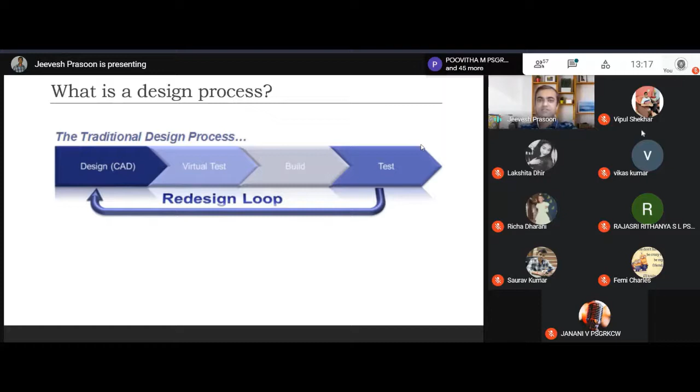Then you do a virtual test, and then you build it and test it again, so a physical testing happens. Between design and test, there are two options: a virtual test and a build. So this is where FEA comes in — the role of finite element analysis begins at the virtual test stage. This is the design process.

In this design process, we do virtual testing, because if you think of the old stage when there was no FEA, you used to design something, then build it using so many resources — manpower, material — and then test it, and once it fails, you design it again. So once virtual testing comes into the loop, whatever testing you are going to do is done using a virtual test. If you say in short what FEA is, you can say we are simulating a test virtually.

Like if you see any National Geographic channel, Discovery Channel, you see a pilot doing virtual testing. They don't directly go fly an aeroplane; they first do a virtual testing. So that virtual testing is not something real, it is a simulation.

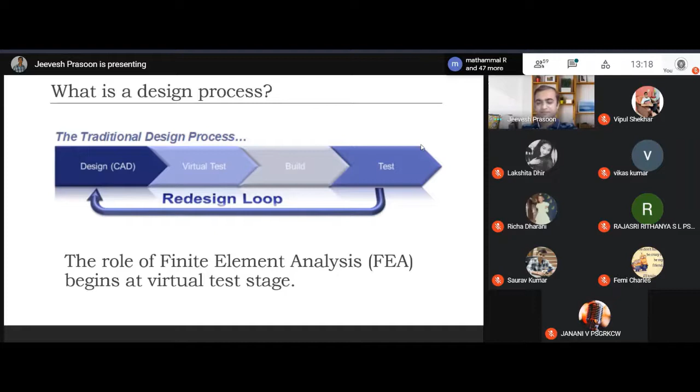So let's start with what is FEA. This is nothing but a numerical method of solving engineering or mathematical problems. It is just a numerical method for solving problems of engineering and mathematical physics.

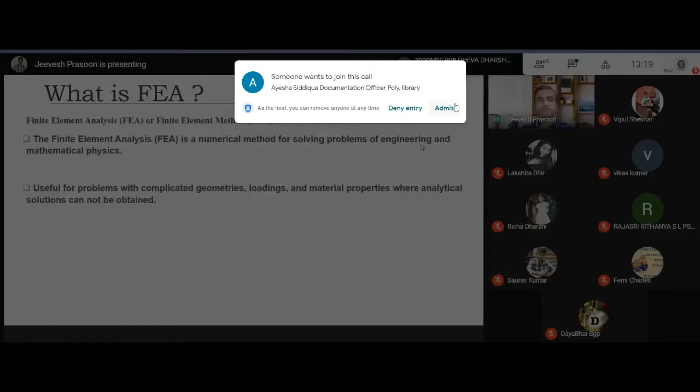And why is it useful? Because in your course book, you work on a cantilever and make so many equations. But in real life, you don't face just a simple cantilever design. You don't see a simply supported beam either — that simply supported beam is just an idea to replicate your real life problem. So this is the basic understanding you implement in FEA.

Once you have a complicated geometry, complicated loads, then you don't have isotropic material — there is no isotropy. There is changing material: rubber, steel, aluminum. Then how do you obtain a solution for this?

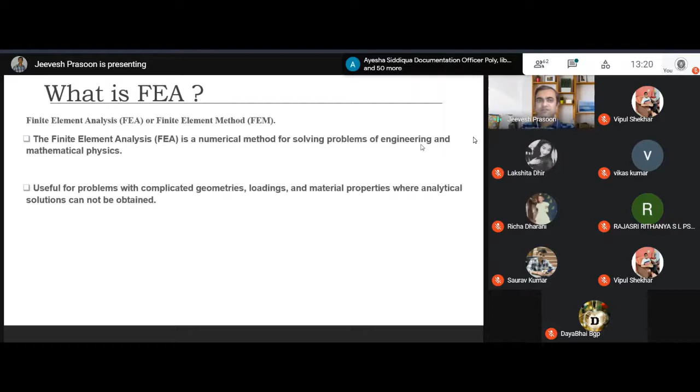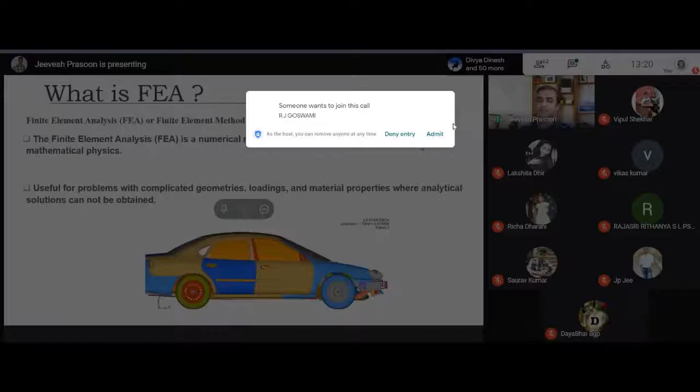But why do we do it in FEA? Because once you develop a car, it takes a lot of effort and a lot of components. Then you go and hit it — what happens? It breaks everything. And if the model gets cracked and doesn't pass the crash criteria, then again we have to design it.

Again we have to build it, so the cycle time of any development will be increased. Right now, if you start a design from scratch, you get a finished product in 3 years. But if you go in that loop when there is no virtual testing or anything, then it may take 6 years or more.

Earlier, when I was in Tata, I know very senior people who used to say they started designing a bus, LPO 1512 - whatever bus you sit on Tata Motors, there is LPO 1512. They started designing it in mid 95 and launched it in 2002. Now we started designing a bike in 2016, and in November or December 2018 we release it to the market, because we have decreased the span time of build and test.

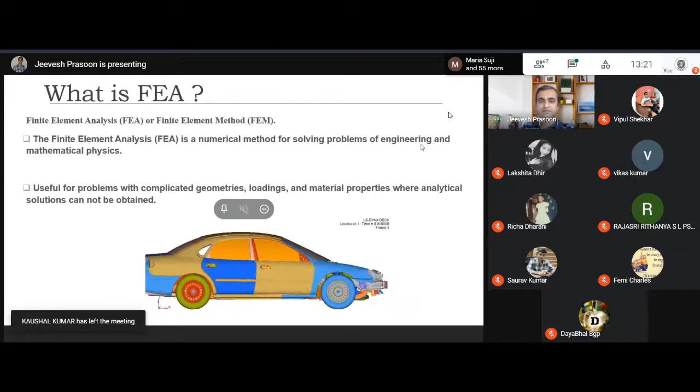So all these iterations of design can be done before that. In this way, FEA is very helpful for real life problems - why FEA? It's helpful for solving problems of engineering. So what are the engineering questions that come up? What are the engineering problems?

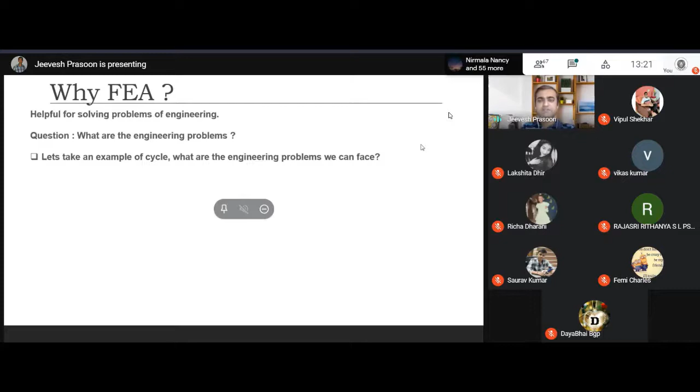Let's take an example of a cycle. What are the engineering problems we can face? This is a cycle, and what are the problems you can face? I have listed some of the problems. What is the strength of the frame?

If a person weighing 85 kg sits on this cycle, will it break? Or can it sustain a weight of 200 kg also? If you see in our villages, people used to put so many bags on it, rope it, and then go. So is it designed for this many loads?

Then what is the impact strength of the wheel? You remember when you are cycling at speed and you hit a breaker, you feel a sudden jerk. That jerk is taken care of by the wheel. So what is the impact strength of that wheel? This is a very common and important thing.

Then what is the strength of the pedal? You remember we used to cycle standing on it. So if a person of 160 kg stands on that pedal, will it break? These are the questions.

What is the strength of the carrier? If a person of 100 kg sits on a carrier, will it last its full life or will it break after a certain number of kilometers? So what is the natural frequency of the frame?

Why natural frequency? Because your road gives a certain frequency - there is a certain operating frequency that comes from the road. So will it lie in between those operating frequencies causing resonance?

So what is the fatigue life of the pedal? How many times can you pedal it, and at what cycle will it fail? What is the strength of the stand? When you apply the stand and sit on it, will it pass or will it bend?

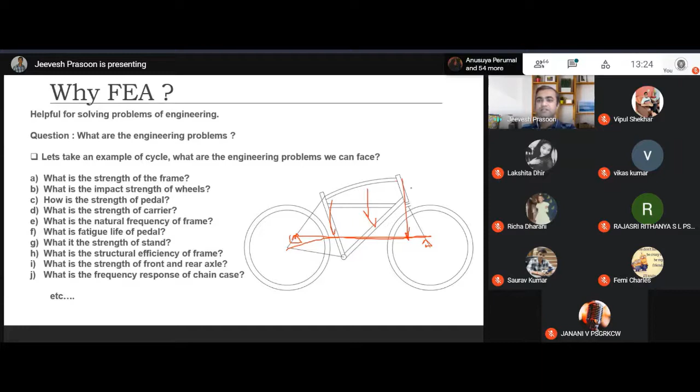If you see, this is a kind of simply supported beam, right? So you fix it somewhere here, and here, and then you apply a load on this from here. These are the weight of the frame, and then a rider sits here, a 75 kg rider - so what is the weight? This is the basic thing which you study in your university, and then you have to implement it here. So this way you have to think - you make a line diagram and then you design a frame.

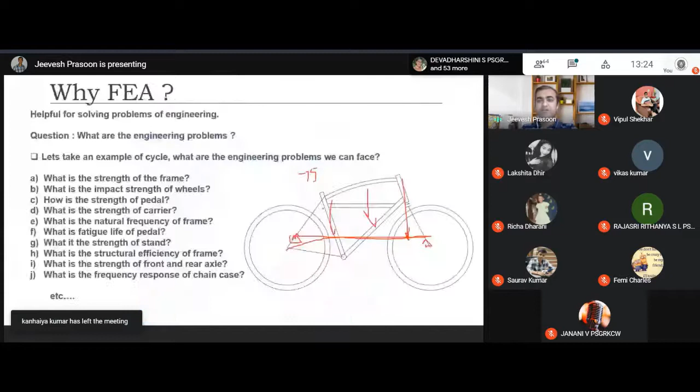So how do you solve engineering problems? Engineering problems are solved using these methods. This is the analytical method - a classical approach, 100% accurate result, where you use formulas, generic formulas. There are governing equations for a cantilever beam, simply supported beams. Then there is the numerical method, where you have a mathematical representation of your real life problem.

Today we are going to discuss this numerical method. This is a numerical method where you represent a real life problem as a numerical problem. So once you have a frame, what you do is make a line diagram. You are representing something, a bigger model, as a line diagram model so that you can simplify it. Similarly, any analytical problem can be converted into a numerical problem.

And there is another method, the experimental method. What is this experimental method? It is nothing but applying some measuring devices, like a strain gauge or an accelerometer. You apply them and measure the strain value, the acceleration value. You have a pressure film where you can take a pressure reading. Then you go for a fatigue testing rig and apply a number of loads, and see at how many cycles it fails.

So these are the things happening. With these three ways, you can solve any problem: analytical method, numerical method, and experimental method.

Then it comes to a time trade-off. If a company is working with the analytical method and gets a product of a frame, you will end up solving the governing equation, deriving it, taking more than two or three months. So it is a trade-off of time. It is 100% accurate, but you are investing a lot of time, and iterations are very difficult to go ahead. Then it comes to the numerical method.

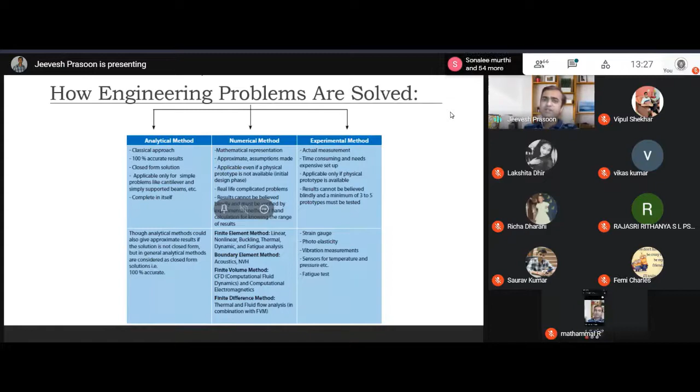It is a representation model where you make some assumptions, and then you see whether these assumptions will alter the result. If it is not altering the result, we say we can go ahead. If you see in your numerical problems, when anything comes to 0.000001, you say in your notes we neglect it because it is very negligible. Similarly, any assumptions we take can be neglected in solving, but it may have significance in the real world.

In solving a numerical method it can be neglected. The experimental method is a costly method where you need a product, you need manpower to set it up, and then you run it with a lot of money and effort. So this numerical method is widely accepted. Finite element method, boundary element method, finite volume method, CFD, NVH — all those things are done using this numerical method. So today we are going to discuss this.

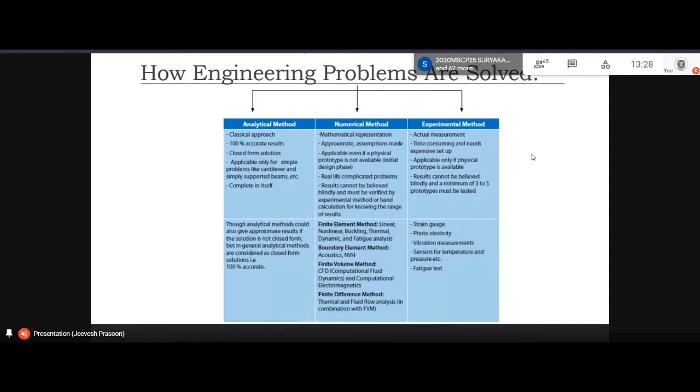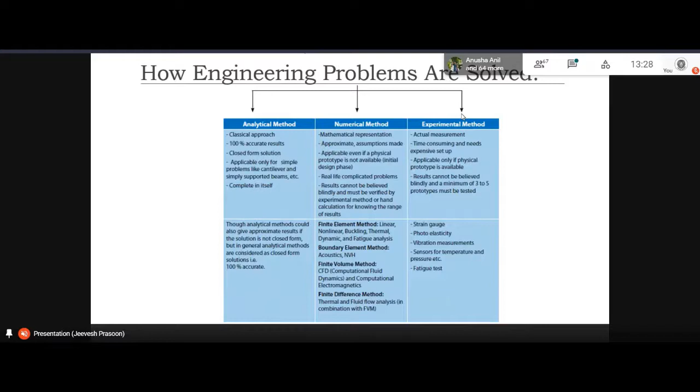If you find numerical method clumsy or hard to understand, it is nothing like that. If you go to a course book, yes it is hard to understand, but I have opted to make it a practical approach. So I will go through what is the analytical method.

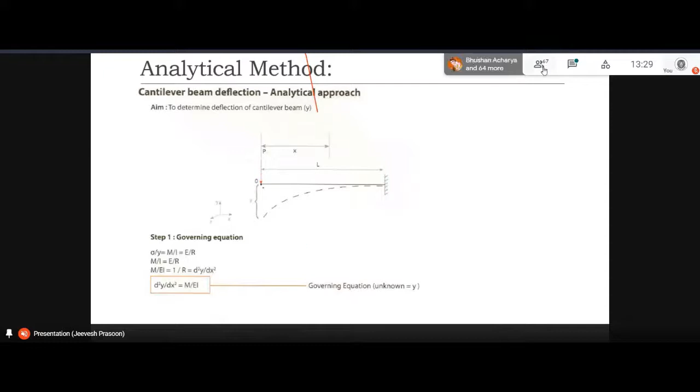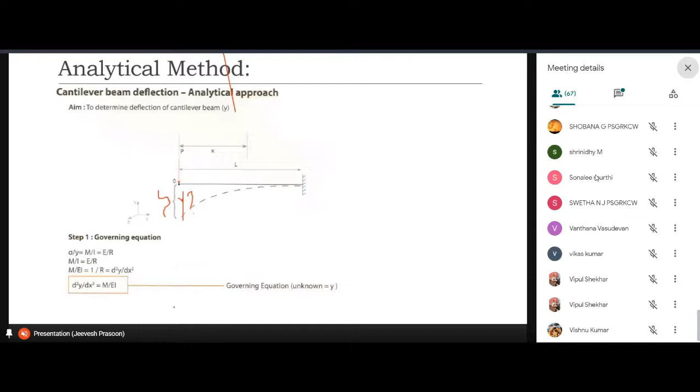You get a cantilever beam. You apply a load from here, and you want to know the deflection at point Y. You apply a load here, and this is Y, you want to know what is the value of Y. You have this problem's governing equation, you solve it, double integrate, and whatever the process, you get Y equal to this formula. It is very easy and it is 100% accurate, assuming the beam is of the same cross section and the material is also the same. What are the assumptions there? Using those assumptions, you will find out what is the displacement of Y.

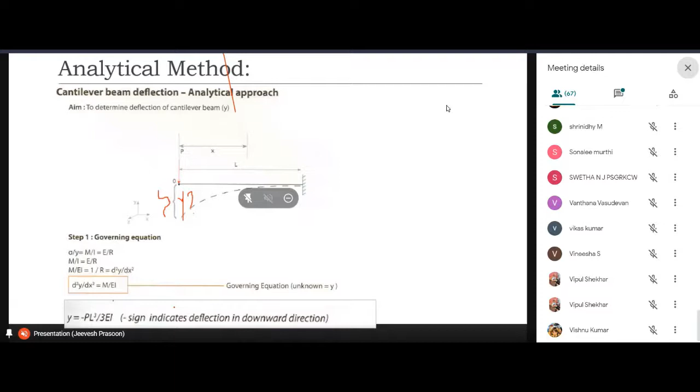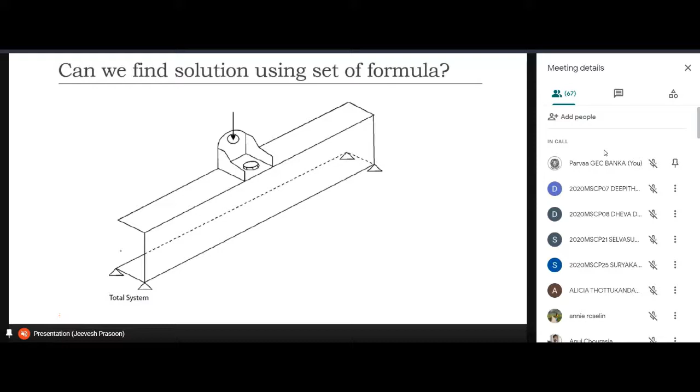So can we find a solution using this formula? Yes, we can find it. There are so many problems solved using MATLAB and similar tools, but it is very time consuming. Also, if you have a complex geometry like this and want to know the stress level at this location, what is the stress level at this location? If you apply a load from here, is this bolt intact or not, is the location correct or not, will it bend from here?

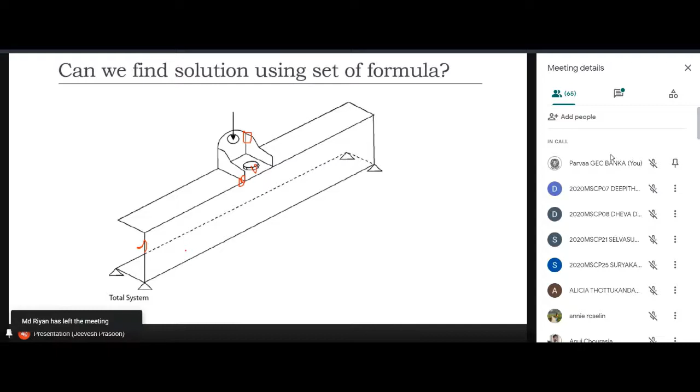What will happen if we apply more load? What will happen to it? This way, it becomes an approach for a software or something. So you might be knowing ANSYS. It is very common in universities, but there are a lot many softwares for this finite element method. We will come to that one by one. Using formula, yes, we can do it, but it is time consuming, and we cannot find at each and every location what is happening. So then why do we do FEM?

If it is an accurate analytical method, then why will we do it? Because it is very difficult to find the governing equations of complex geometry.

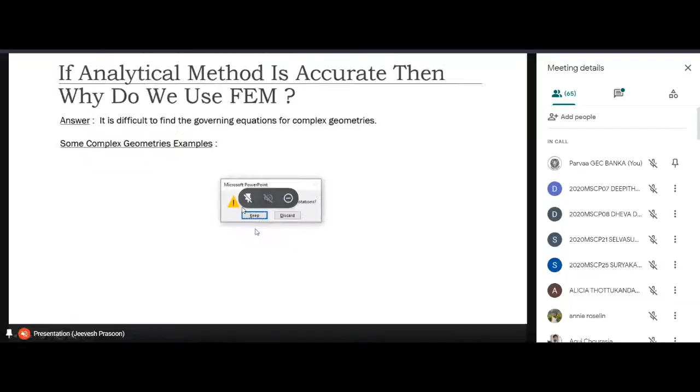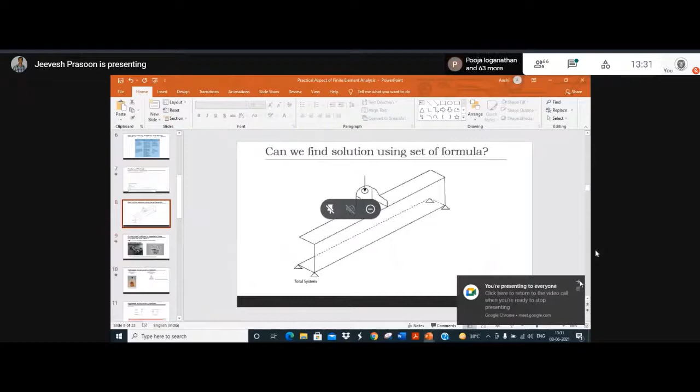Sir, sorry to interrupt, but can you please share your screen again? Okay. Is it visible now? Yes sir. Was I here, or from where was I missed? No sir, you can continue. You guys can speak if I'm very fast because I'm a fast speaker. So, is it okay to speak this fast, or may I be slow? So it's okay, I think then.

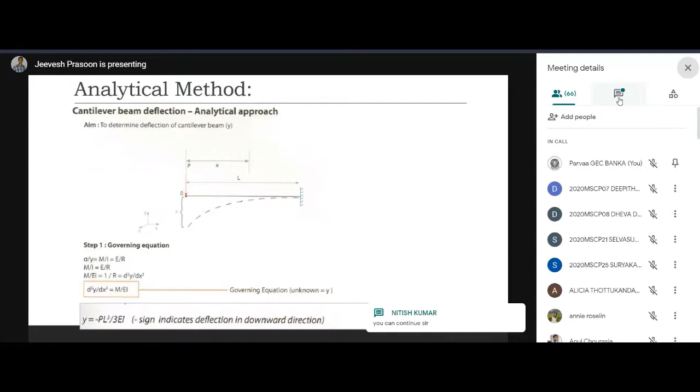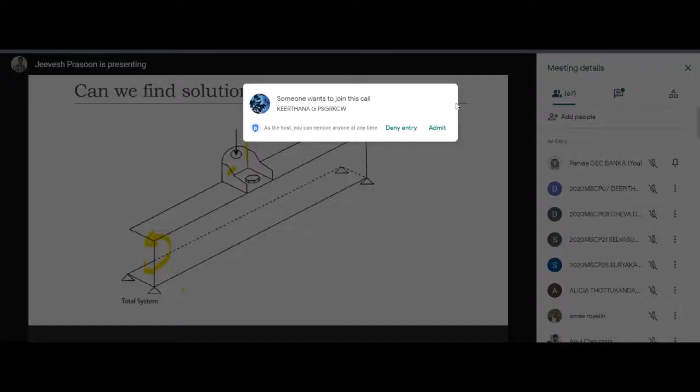So this is a geometry. This is an analytical problem of this cantilever beam, and using this you found a deflection at y location of y. Then it comes, what is the problem when you want to find the stress values over here, at this location? What is the bending that will happen at this location? So these things can be done using your analytical approach, but it is a time-taking approach also.

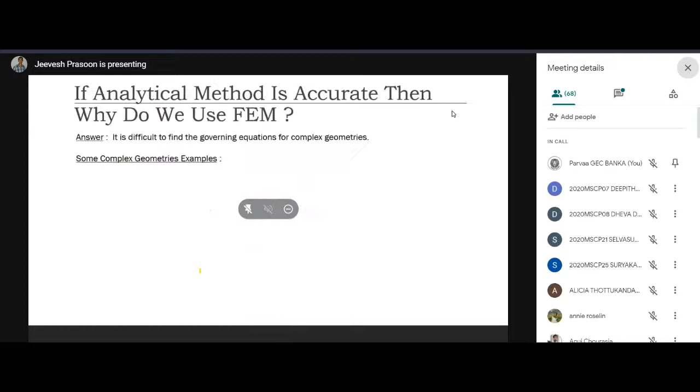So in this way you need a technique where you can do it very easily and very fastly, and also it is accurate. So if analytical method is accurate, then why do we use FEM? This is a question. It is difficult to find the governing equation of a complex geometry. So you have the governing equation for this, and using this governing equation, you can find the solution to this problem. So there is no governing equation to find this. You have to superimpose so many governing equations to make a simple problem for this, and then that is the assumption also.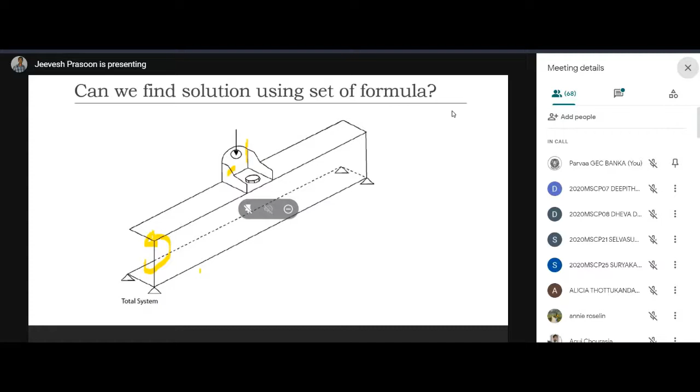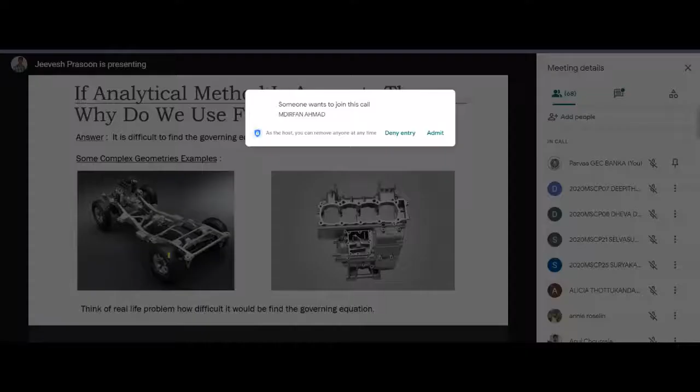So this is my lunch time, so excuse me if I'm eating. I have a meeting from 2 to 5, so I'm doing all the things in the meanwhile. Is it okay to you all? Yes sir, totally fine. Okay.

So these are some complex geometries. So you see the frame of a car. Is it possible to find a governing equation and then do a paper-pencil formula and find out the solution? It will be very difficult.

Then you see the engine. This is a case of an engine, a crankcase you can say. So how will you know the stress level coming at this joint? Which is the stress level at this joint? Whether this cushion, this suspension mounting, will sustain the load coming from the road when it goes over a bump.

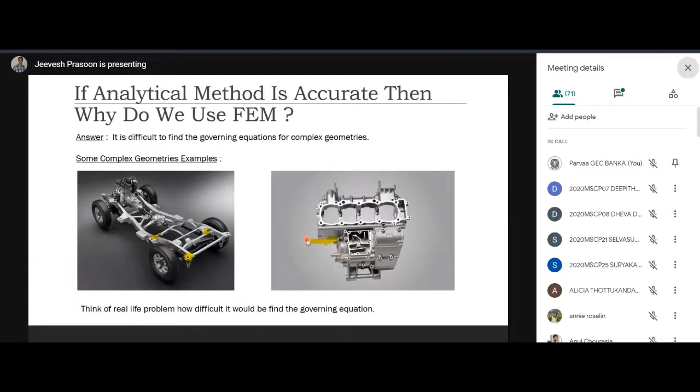So these are so many engineering problems. While cornering the car, what are the forces coming on this, and will it sustain these forces? So these are the problems which we face in our real life. So thinking of the real life problem, how difficult it will be to find the governing equation.

Then it comes to the approach to solve any problem. So I have told you there is a real life problem. A child is sitting on this table. This is a problem, and there is a leg of this stand, a stool. Can we convert it into a mathematical problem? Yes, we can convert it into a mathematical problem. You will make a line diagram or something, and then apply a load on this.

So any real life problem is a continuous problem. There is an infinite number of particles, infinite number of elements. If you take out a leg of this stand and cut it piecewise, you can make an infinite number of cuts. But in an equivalent mathematical model, we make it a finite problem, and that's why it is called finite element analysis, a method.

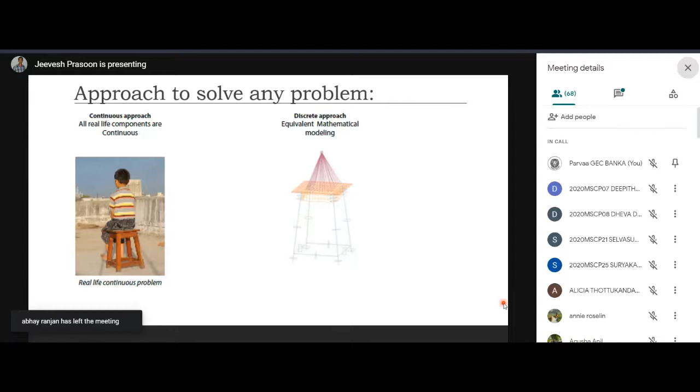There is no difference between finite element analysis and finite element method, both are equal. Finite element method is widely used in course books, and analysis is when you get a component and then analyze it using finite element methods. I'm very used to the word FEA, finite element analysis, since I'm an FEA analyst, so FEA comes to my mouth naturally. This is finite element analysis, same as finite element method.

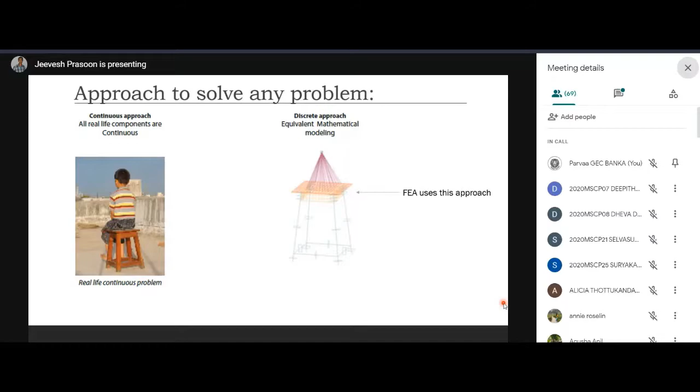FEA uses this approach: you make a mathematical model, and when you make it, you discretize it. Discretize means you cut it into pieces, and then make a mathematical model for this. To solve any mechanical engineering problem, these are the basic requirements: you need mass, stiffness, and a damper.

All numerical methods, including FEM, follow a discrete approach. Discrete approach means dividing a component into small pieces to form a simple piece. So take an example.

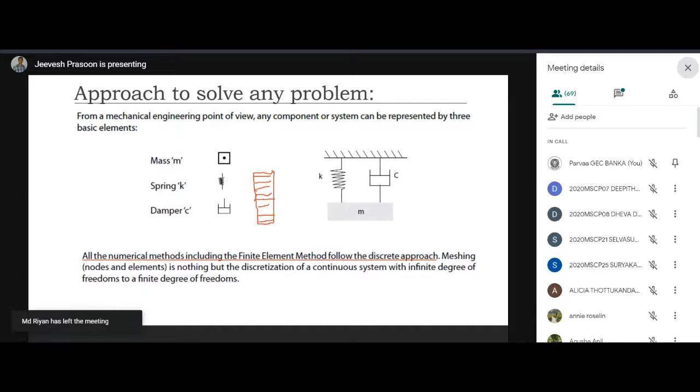For example, if you have a scale or something, how can you make it? You can divide it like this into three blocks, and then assemble it in this way, and you get a scale like this. This is nothing but discretizing. So meshing is creating elements - you can say this is one element, this is two, this is three.

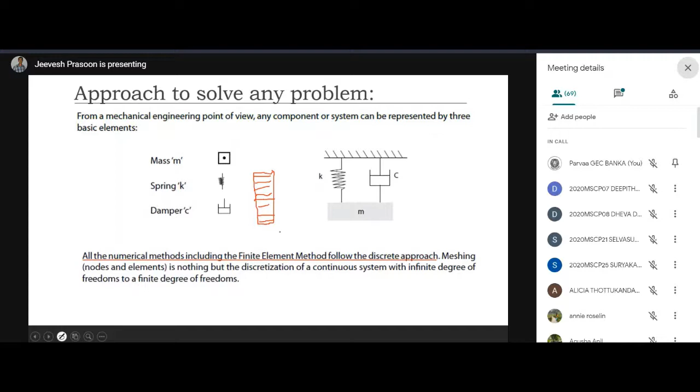Elements are connected using nodes, which you can think of as pins. If you apply a pin, fix it, apply another pin, fix it, apply another pin, fix it - those pins are nothing but nodes, and a piece of this structure is an element. When you assemble it totally, you get a scale.

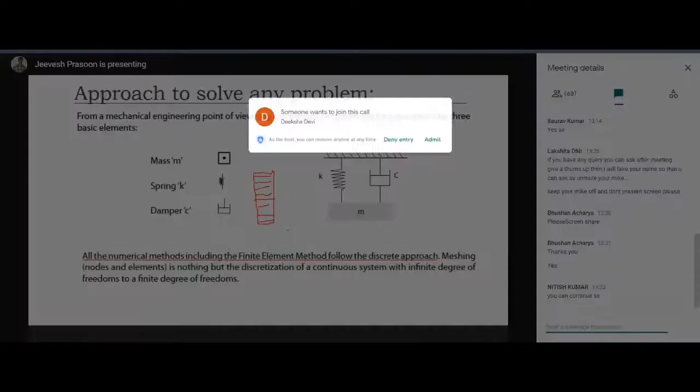So this is all about scaling and discretization. Then you apply a load from here, fix it from here, and if you want to know the buckling strength of this structure, you can find it using these formulas.

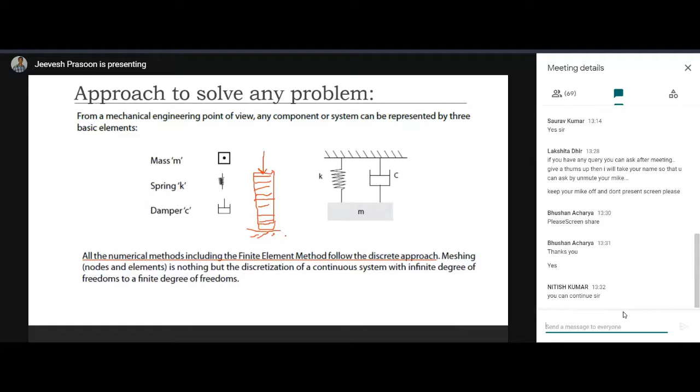I will go through what is happening. Degree of freedom - you guys know, this is when you have fixed all directions of rotation and translation, so we say we have fixed all DOF. The component which cannot translate in any X, Y, and Z direction, and cannot rotate about X, Y, and Z axis - this is a problem we used to find.

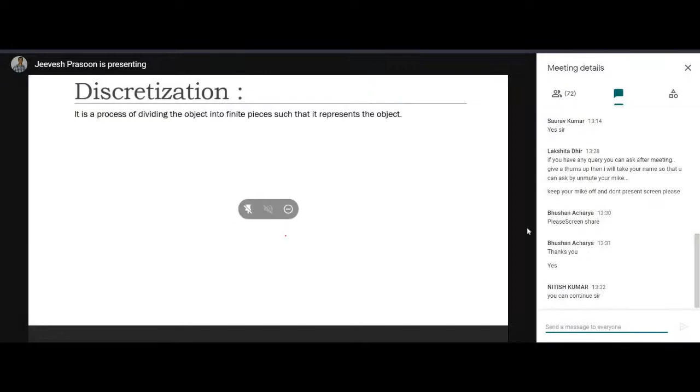So I have told you what discretization is. It is a process of dividing an object into finite pieces such that it represents the object. You see this is an object, then you make it into finite pieces - in this case 3 pieces - but the object is still represented. This is a trapezoid or some shape, I don't remember exactly, but it is divided into 3 elements.

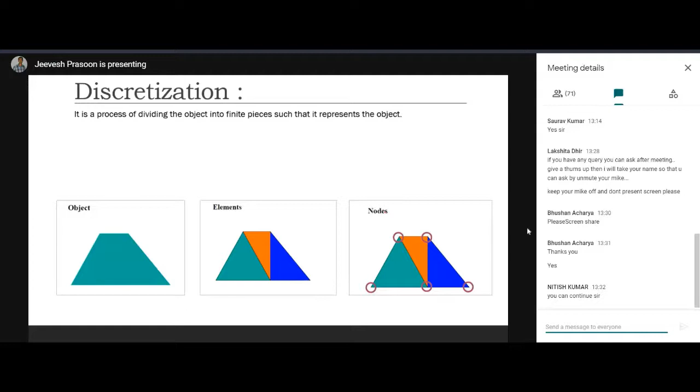So we have discretized it into 3 elements, and these elements are connected using pins, which are called nodes. These are the notations used in our FEA. So this is a discretization example.

You see this is a rack where you fix it everywhere, and then discretize it using a one-dimensional element. One-dimensional is something like a nail or a pin, that is 1D. Then there's a two-dimensional triangular element - this is a hook, you can divide it into so many elements to make a hook. And there's a bracket, which is a shell element.

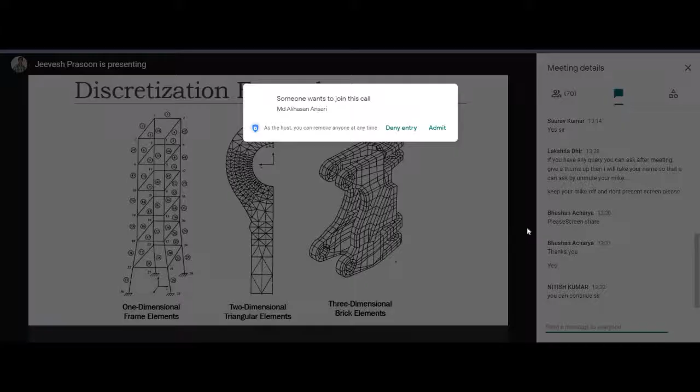A shell element is like paper - you have a paper, you can bend it, fold it anywhere. Then there is a brick element, like a duster or a brick, so it's called a brick element. It is very hard - it has only 3 degrees of freedom and no rotations. In real life, you cannot bend something like this with your hand. So this is a 3D brick element.

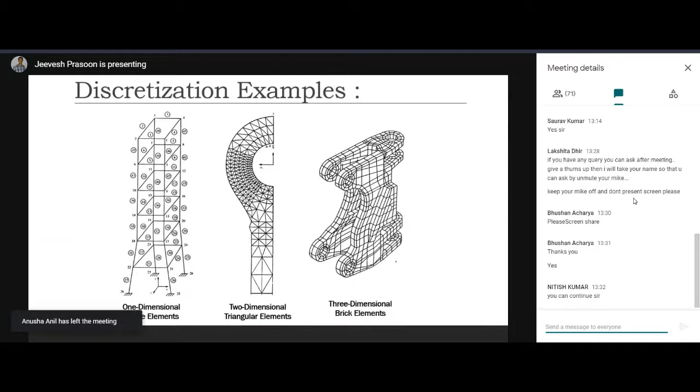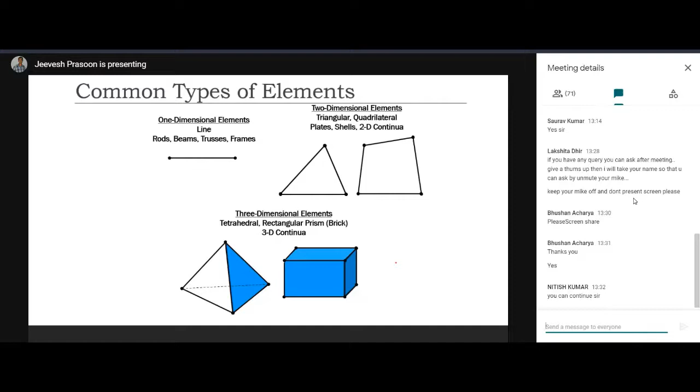These are the basic library of elements in our FEA - this is a common type of element. This is the 1D element: rod, beams, truss, frames, whatever you study in your course book. Then two-dimensional element - this is a plate element, quad element. And three-dimensional element - this is brick element or tetrahedral element. These are the types of elements available in any of the FEA packages.

Then it comes, what is the concept through which we can get a solution. Let's say you have an object. That object has its stiffness. Then you apply a force. Then you want a displacement. So this is the governing equation for any FEA solution, any FEA solver. K is the stiffness, U is the behavior, like when you apply a force, how it will behave. So this is a behavior, and this is the action. Property is of the component, like a frame, like an object.

It has a stiffness. So how do you find the stiffness? You know area, you know Young's modulus, you know length. You have studied this in your FEA, in your strength of materials. So AE upon L, using this you can find the stiffness. So this is a property of a geometry. It is not dependent on anything related to any object. So these are the things.

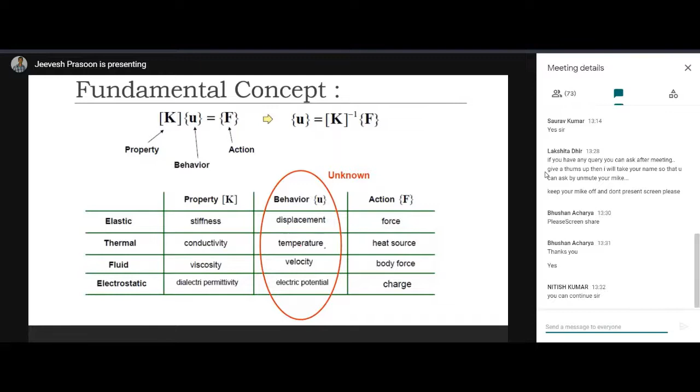So when you do elastic analysis, K is stiffness, this is a displacement, this is unknown. We find the unknown, and then we find the stress and strains at any of the locations. So these are the things widely available for any of the solution. Like if you do it for thermal, then you need to know the heat transfer, then temperature. This is conductivity, and this is the heat source. We do the CFD, then this is velocity, viscosity, and so these are the basic fundamental things for this FEA.

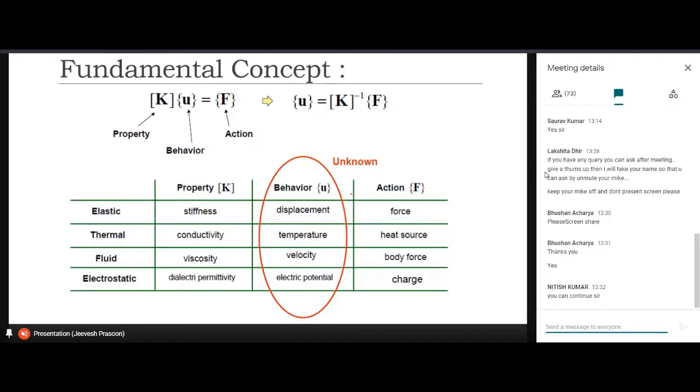So let's say you have this object, and for this object what you do, you have discretized it. You made a small element, and on these elements you have to find the U using this formula K and F. This is a matrix formula. You find it for each and every component, and then you assemble it, and you find it on the object.

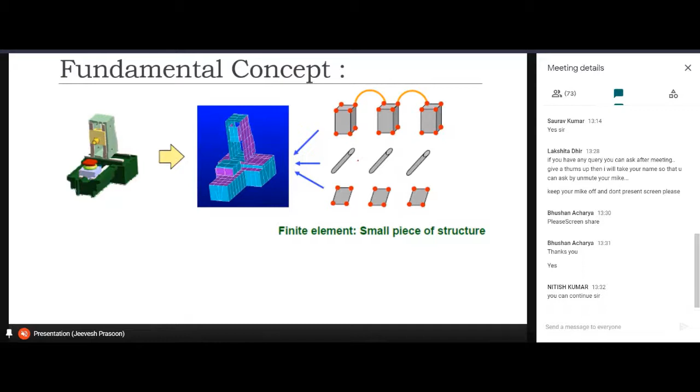So you say this is the object. What we have done is we have divided it into small elements and nodes using these kinds of elements, any of the elements. Then you apply a force. What the software does is it calculates this. It knows the stiffness, it knows the force, it finds the displacement. Once displacement is found, what you come to know is the strain. Once you know the strain, you know the stress.

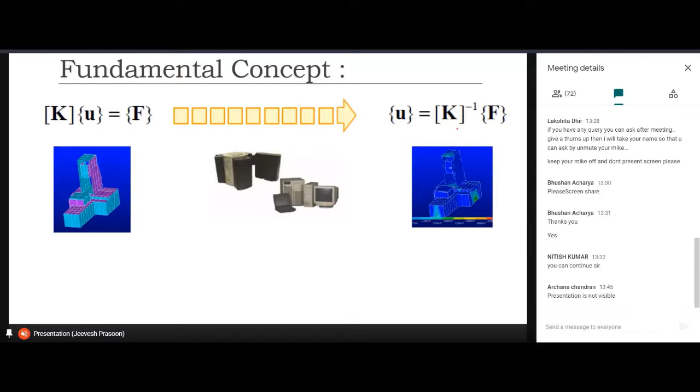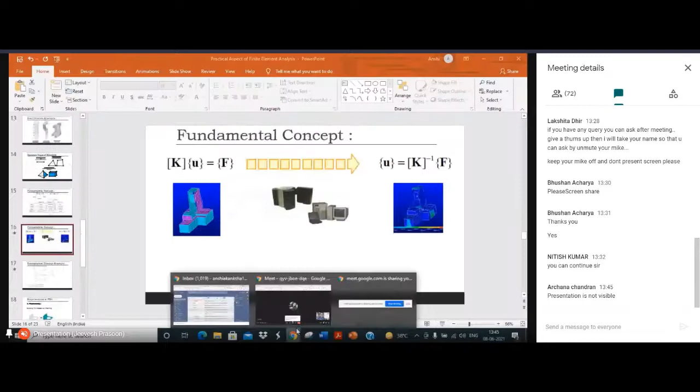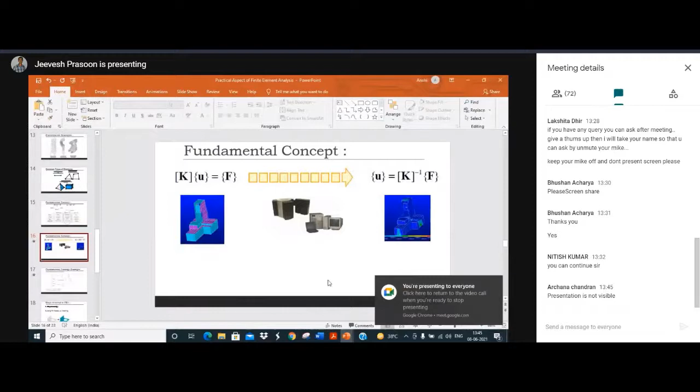So everything which is... sir, your screen is not visible, sir. Oh, why is it happening? Is it visible now? Yes, sir. Yes, sir.

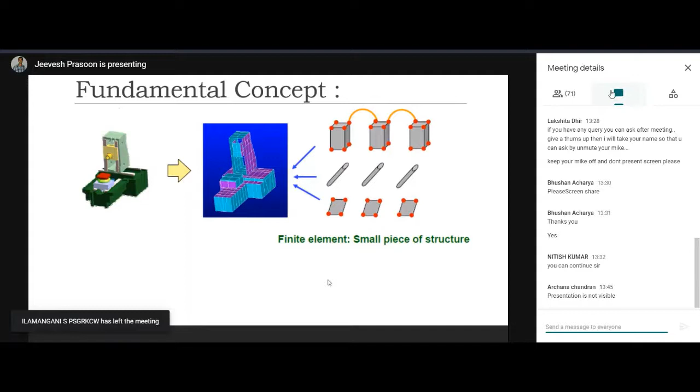So this is a fundamental concept of it, which I was discussing. Say this is a machine or something, which you discretized, and then you have these elements, this shell element, solid element, and 1D element. You form a discretized model. Then you set this up, like you apply a force somewhere, and you have to know the displacement. Once you know the displacement, you know the stress and strain. So for any component which you have to say pass or fail, how do you do it?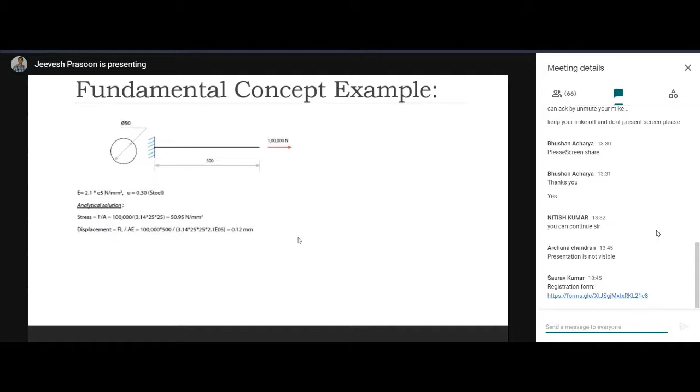So how does software solve it? It uses this formula. So what it does, it has F1 and F2. Then since there are two nodes or two equations, this is a stiffness matrix and this is a displacement matrix. You solve for this matrix and then you get an algebraic equation, and you solve this algebra and you will find U1 and U2.

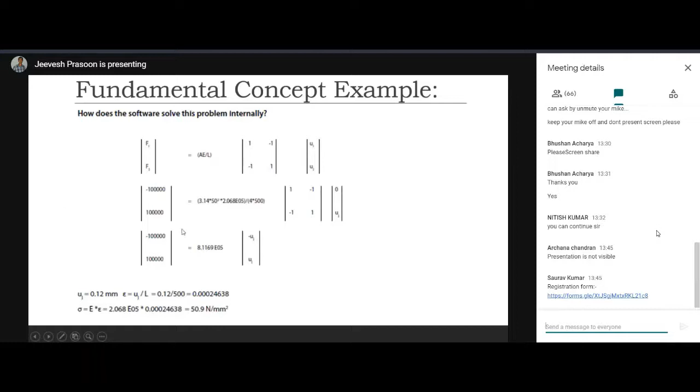U1 and U2 is found, then you have to find the stress. So Young's modulus times the strain is equal to the stress, and you find the stress. So this is something for linear problems. For linear problems, we solve using this technique. So the software codings are done where the codes use this logic. This is the logic being used.

So these are the fundamental things which are happening in our FEA problems. So what are the steps involved in FEA? It's called pre-processing. So you get a CAD model like this. This is a CAD model of a bracket. You convert it into an FE model, which is a finite element model.

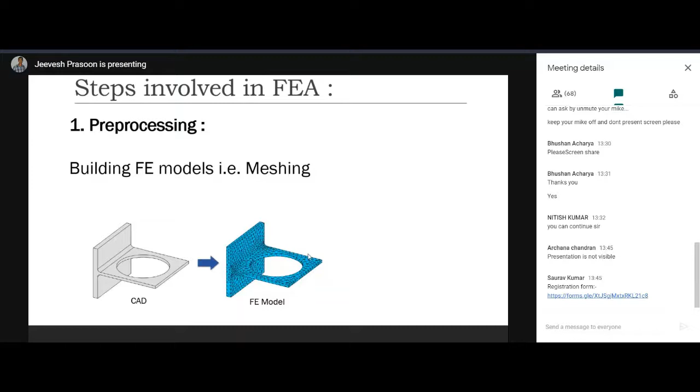So these are the FE models. Then what you do, this is pre-processing. Building the FE model, that is meshing. You create a mesh in which you create elements and nodes. Then after applying force and boundary condition and finding the solution, that is the deck preparation.

So you have this cycle. This is a force, you apply a force from here. You apply a boundary condition, so it can translate in this direction, and it can rotate about this axis, it can rotate about this axis, but it is fixed at all the locations. So this is one of the boundary conditions you apply on this, and you apply a force, and then for finding the solution you submit it on a computer.

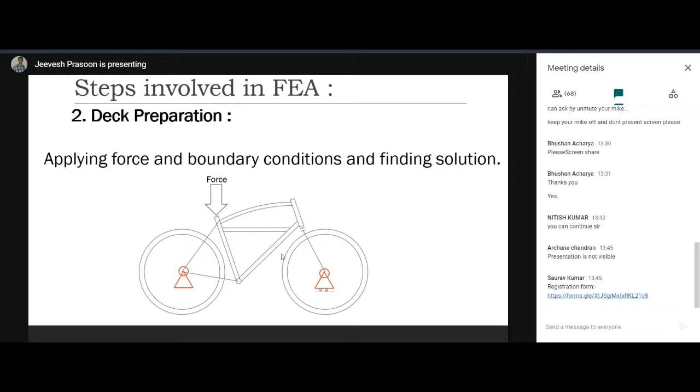You have created an FE model and then you submit it on the computer, and once the solution is found, we get a post-process. So if you apply a force, then you find a stress. So this is a contour, say it is a stress. At this location the stress is lower, at this location stresses are higher, at this location stresses are higher.

So whether this stress is above our yield, so if it is above yield, we can say it is pass or fail. If anything has to bear the load, then it is not only the yield, it is the ultimate strength of the material. So whether the stress is above the ultimate, to reach ultimate you need nonlinearity, because the material curve is not linear for UTS and beyond.

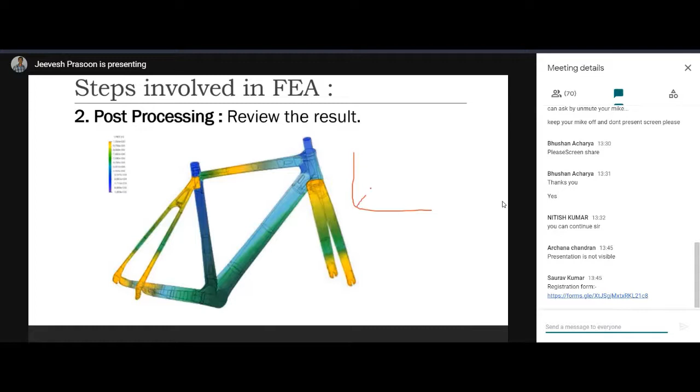If you see the material curve, this is stress and this is strain. For linear behavior it is like this. So this is the stress-strain diagram. This is linear: once the strain is increased, the stress is increased. When you have this nonlinear problem, up to the yield point it is okay, and then it goes on, and then it breaks. This is called a nonlinear problem, and this is called a linear problem.

So when we apply a load where we have linear material property, it is a linear problem. This is a non-linear problem where you have non-linearity of the material. If I go into these things, it will take another hour to discuss all of this, so this is just the overview. If it is a linear analysis, then we are basically focused till this point. If the stress is above this, there is no significance, because above this the stress is not linear.

This is non-linear stress. So for a safe design, when you apply a load, if it is below yield, then the material will come back to its initial position also, so failure will not happen if you have an exact solution for this. So this is the way you find the stress. Then you find, oh, this slot is creating a problem with this stress. Then you tell the designer to fill this slot, and then you check the stress again.

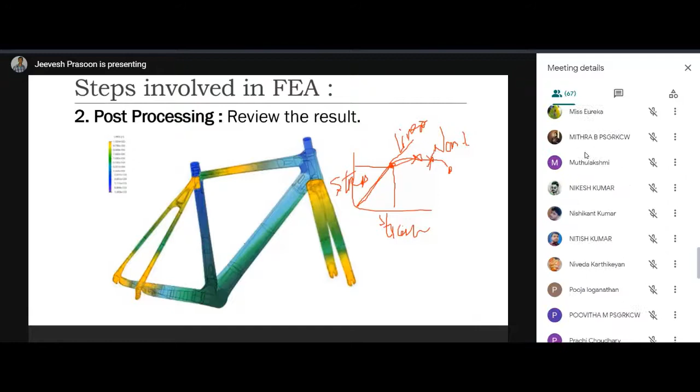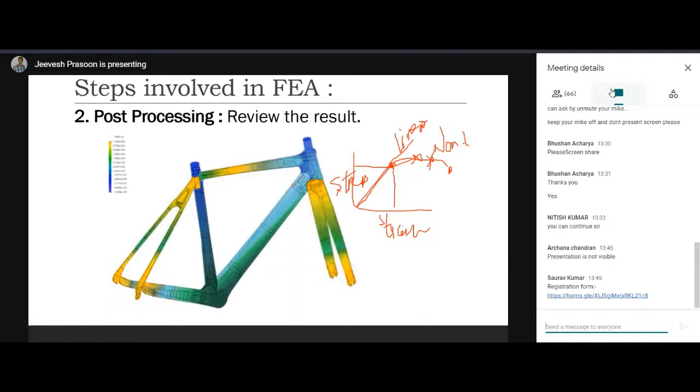This is called the iterative process. Once it is okay from your side, you say go ahead and apply and develop it. Once it is developed, you again test it, because maybe you have missed something. It should be tested so that the end user gets a finished and good product. This is the way it is done.

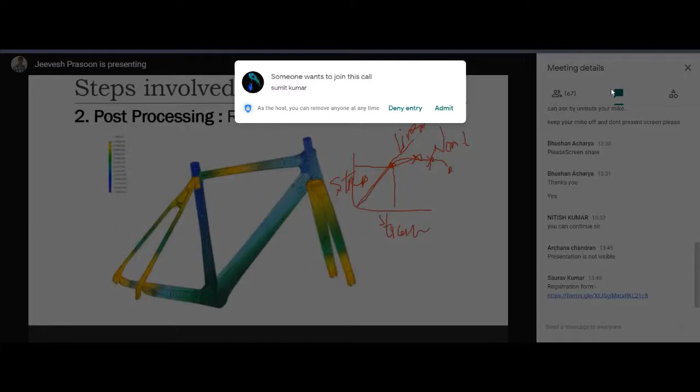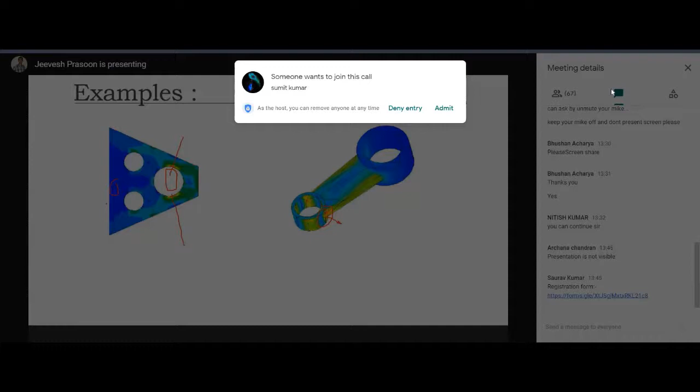So there are some advantages. You can visualize the result at each and every node. If you want to optimize it and remove material, this is the blue zone where the stress is very less - this is the blue zone, this is the gray zone. If you want to add a hole, you can add it here, because it is not getting loaded with the applied load, so there is no stress here. You can cut the material, you can save the material. So this is how visualization is good.

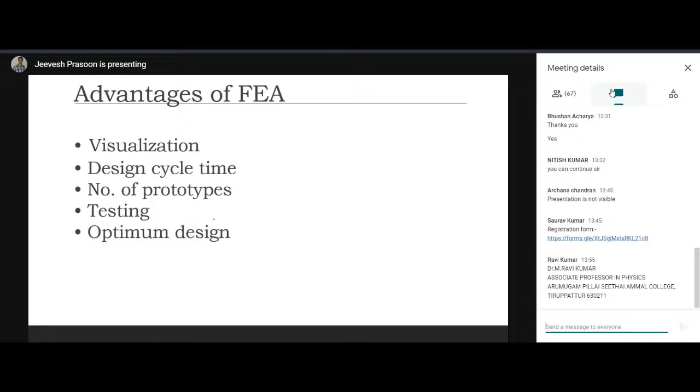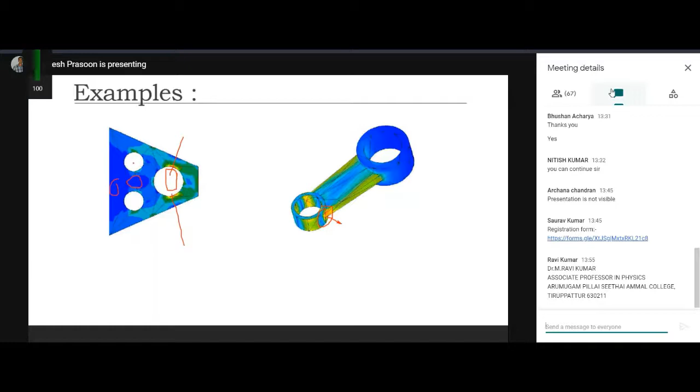Design cycle time reduces, the number of prototypes gets reduced. The testing is done in one shot. You can go ahead with testing and find the optimum design. What I told you is this optimum design involves creating a hole from here, either making two holes here, or you can make a slot like this. If it is not a boltable area, then you can do it like this also. So these are the things that can be done in FEA.